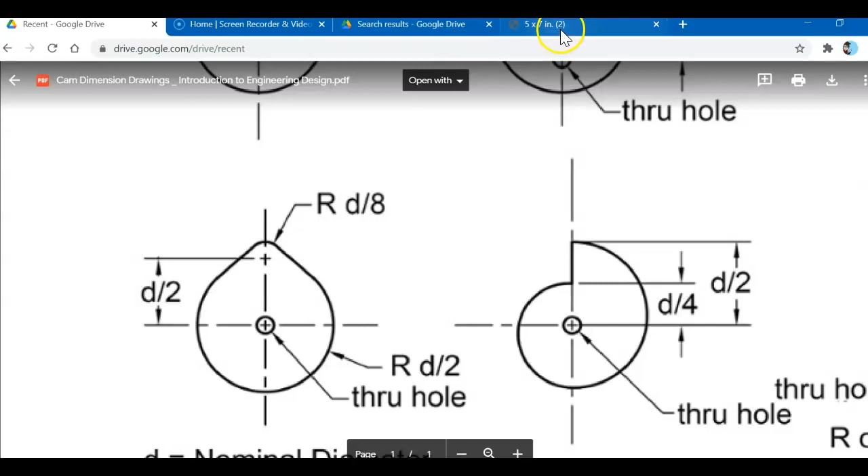In our lesson, you're going to see a pear cam that has this shape. It's kind of like a regular round circle with a little bump at the top. But I really like this one better. It's not in your lesson, but I will give it to you. It just really looks like a pear.

That makes a very smooth motion for your toy. So we're going to work with this one, and I'll share it with you as soon as I get caught up. It's actually very simple. We're going to use parametric modeling so that we can change the size later, and we can laser cut them really quick in the laser cutter using this file.

We can do it right from Fusion. So we're going to make a circle, and then we're going to make a smaller circle, and we're going to add the lines to connect them, and then just extrude it a little bit and add that hole, and we'll be good. So take a look with me.

Whatever diameter you have, everything else is based off that. This radius down here is going to be half of your diameter. And this spacing in between, this will be the center of the small circle, center of the larger circle. That'll be half the diameter. And then this radius up here will be a quarter of the diameter. And then the hole in the center will be 3/16, which we'll change based on whatever axle size we decide to use so it's nice and snug.

All right, so let's see if we can get in there. And we're going to switch back to Fusion. So I'm in a new project. You just want to double check that you're in inches by clicking Document Settings right here. And then you should be good.

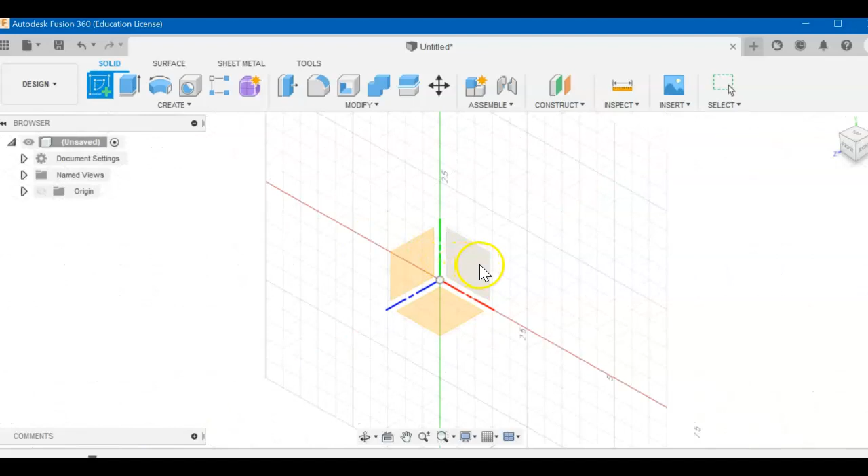We're good. Okay, so we're going to create a sketch, and we're going to put it on the front plane, right here. It's a little tricky sometimes to see it, but you know it rotates to front over here if you're in the right spot. We're actually going to use a line tool to get started. Click the line tool, top left, click the origin, drag up.

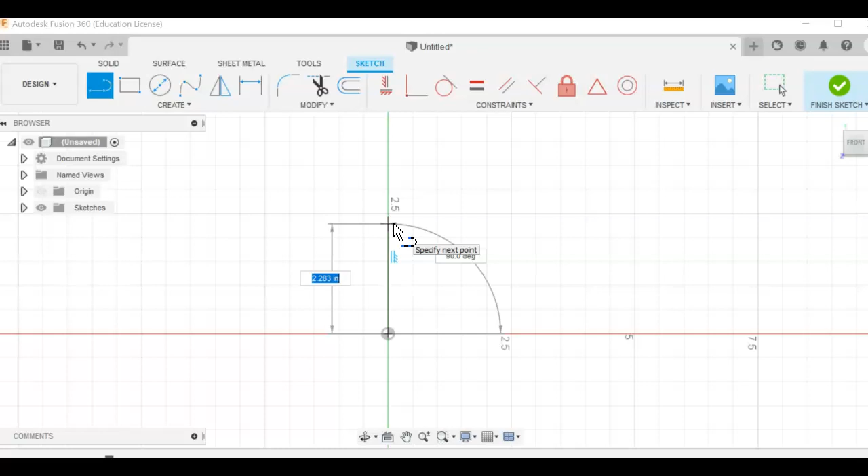Instead of putting in a dimension, we're going to put in diameter, DIA, lowercase - see how it notices what we're doing? And we're going to use the forward slash to divide it by 2. So 1 inch divided by 2. And I'm just going to zoom in on here.

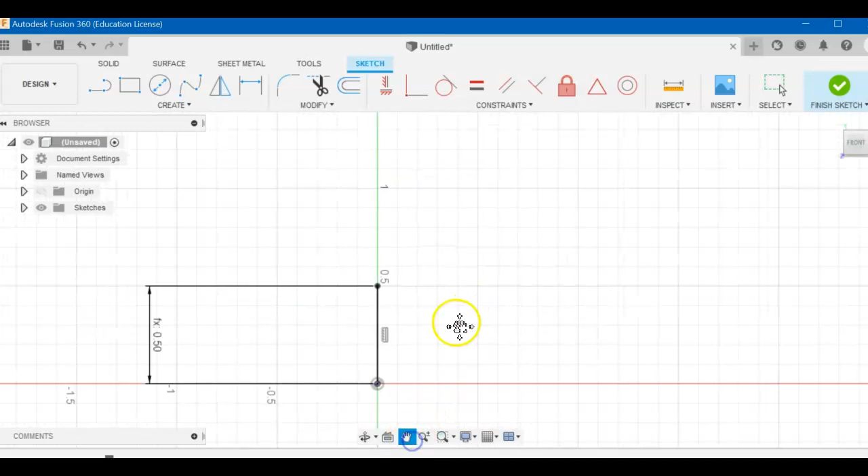As you get more advanced with this, people who do this regularly really enjoy it. They tend to stick with it, they tend to like just do parametric modeling. So you'll see that, especially if you go for internships when you're a little older. If you double click on this, you don't have to do this, just watch - because you could also do diameter times asterisk 0.5, because 0.5 is half, right? Same thing, so you could do multiplication, division. It knows what to do. It's intuitive if you use the right tools.

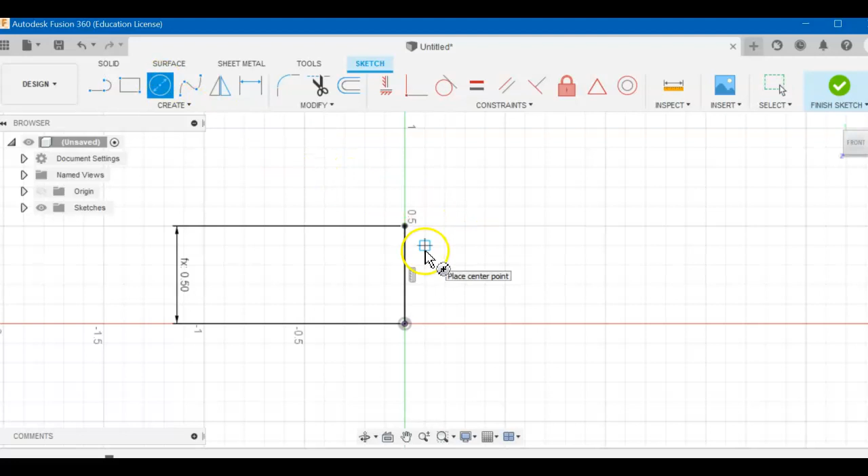So we have that. Now we're going to grab the circle, and this is a little tricky, so watch along. Grab that circle tool on the top there, get on the origin, drag it out, and we don't want to do any dimension. We just want to hit enter. So it looks like it automatically popped one in there for me.

I'm going to click on the number, left click, hit delete on my keyboard, because I want that to go away. Now I want to grab the dimension tool, and I want to right click. So I'm just using my keyboard here, but I want to right click, and I missed it.

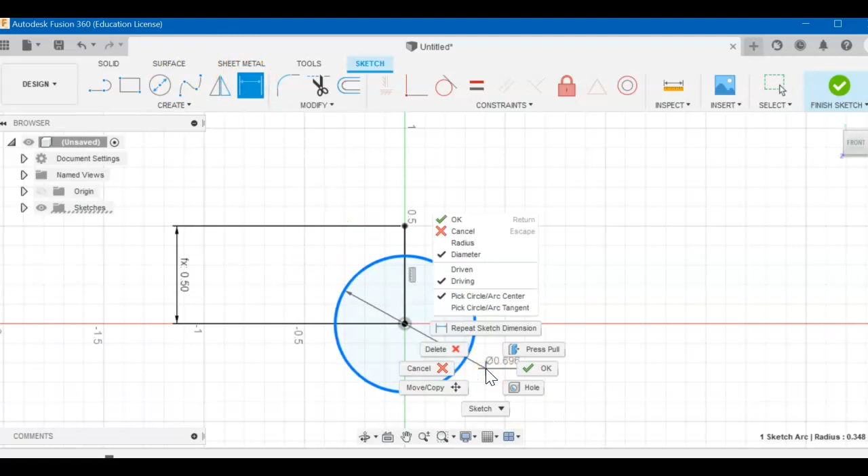I want to try that again. Drag it, dimension, right click, and I want to switch to radius. I imagine I could have done that the first time. I'm new to that part. Yeah, let's get radius. Let me get you the right number. I think it is half the diameter.

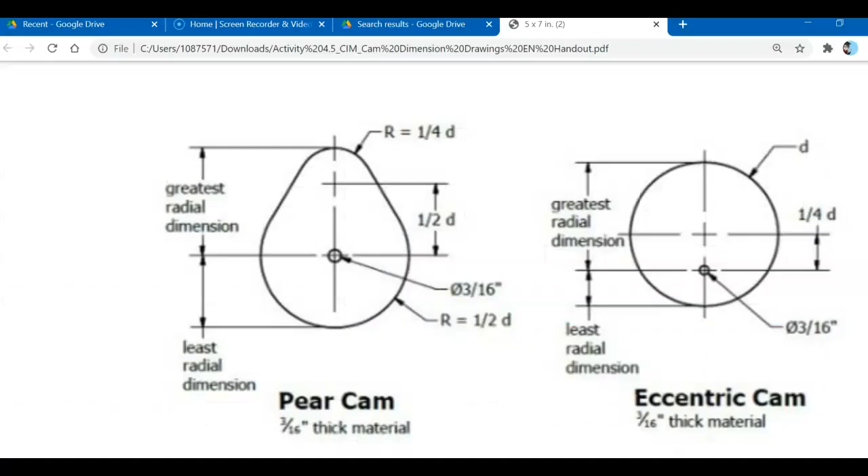So DIA, click it, DIA divided by 2. And I got that by looking here. Radius is half the diameter. So I'm going to say fusion diameter divided in half, 0.5. That's pretty good. The top one's going to be 0.25. So we're going to work on that next.

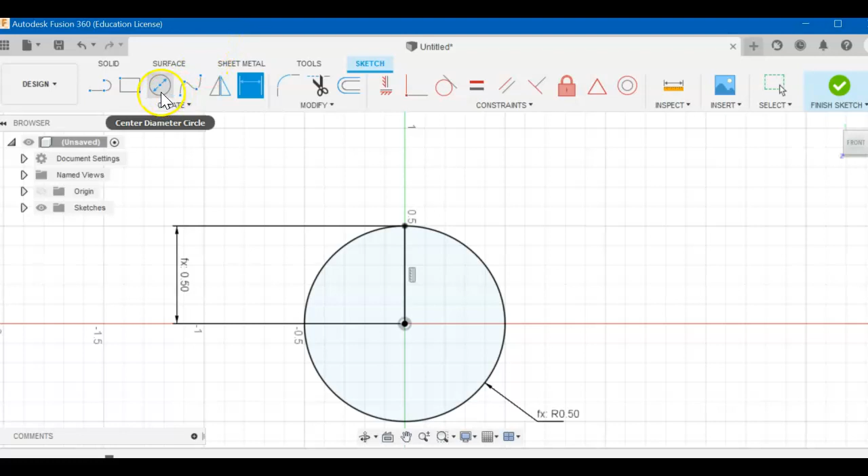Forgive me, let's see if I get to the next part here. Okay, so now we're going to take another circle tool, and we're going to go right on that point that we made there. And we're going to try right clicking. Oh, see, it doesn't let you. Okay, so I'm just going to click. Don't worry about the size.

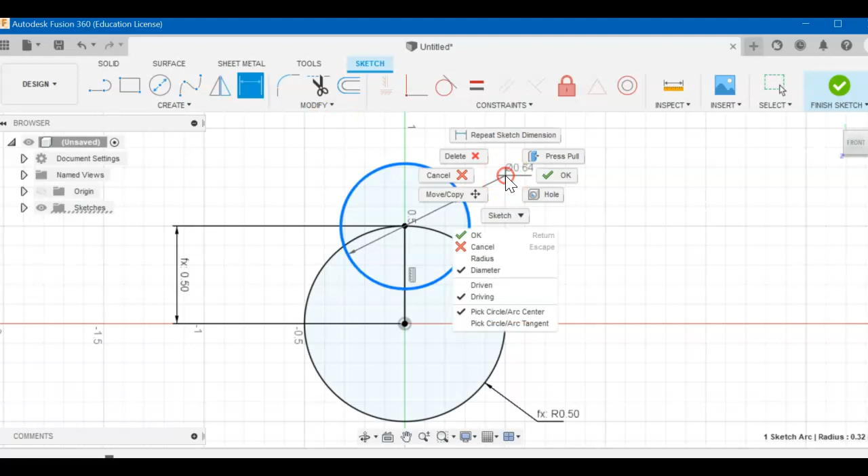I'm going to grab the dimension tool, click on the circle, right click and change to radius. And then I think I may have messed this up. Hold on. Please show me, I'm trying to read my notes from doing this.

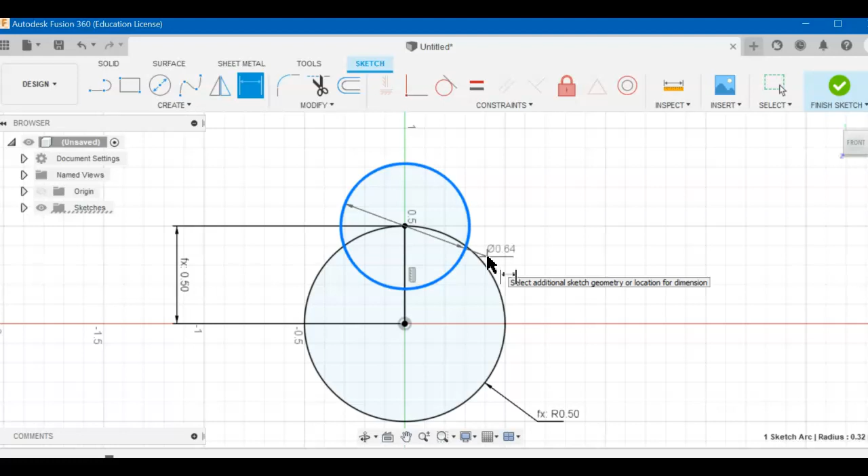And it needs to be a quarter, right? So we're going to put in DIA and divide by 4. So click DIA, divide 4, because that's a quarter of an inch. Okay, a little tricky there, but we're getting the hang of it.

Just drag that over so you can see it. The proper way to do a circle or curved line dimension is to have this. See how it's not straight? Like this would be incorrect. But a curved, a bent line, yeah. Okay, so we're good here.

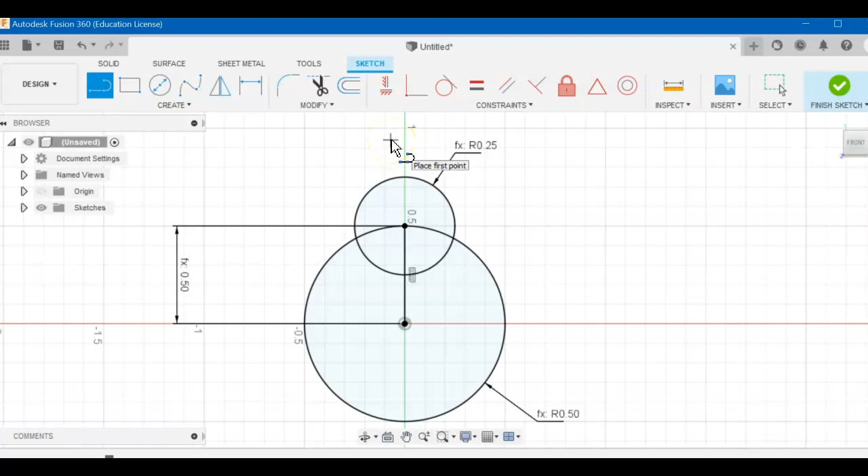Now we've got a little snowman, right? So we're going to take the line tool, and we're going to make some lines that we can make this tangent to. So above and away from the object, just click, drag a line diagonally. Don't worry about the size. And I'm going to hit escape. I don't know why that's crooked, so I'm going to undo that.

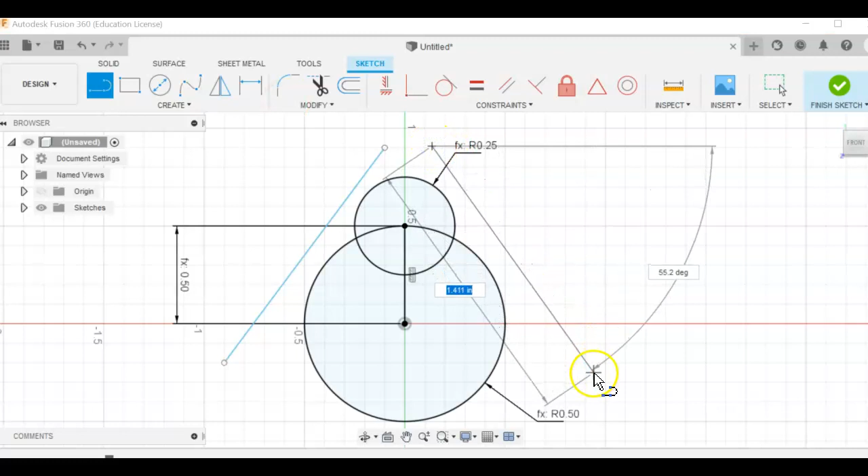Oh yeah, I must have clicked it. I'm not using a mouse. Use a mouse, don't be me. So click, drag, and then get another one. Click, drag. If you find that you're still staying in the line tool, like it's still connected, just hit escape on your keyboard and it goes away.

Okay, so up here in the top we have tangent constraint. A tangent lets your circle touch a line without going through it. So we're going to hit tangent. I'm going to hit this circle right around here and touch the line. Do the same thing down here. It doesn't really matter where, as long as you're in the general area.

Click, click, do it again. Click this outside, click the line, click this outside, click the line. So you want to be near where you want them to touch. This lets me put everything together and I can trim everything out.

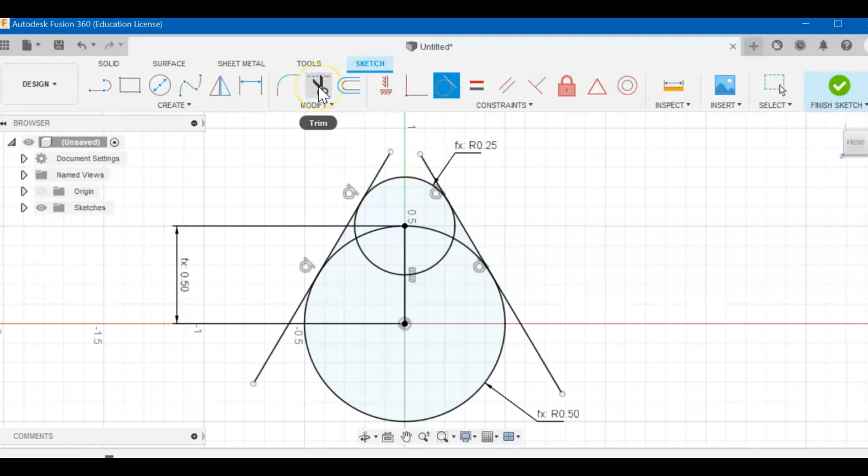So hit the trim tool, the scissors on the top. We're going to get rid of everything we don't want, which is the top of the line and then the bottom of the line. I'm just clicking. It turns purple and it goes away. And then the inside, let's get rid of this, this.

Lots of error messages yelling at you because you had dimensioned something and now it's gone. So Fusion's like, hey, I can't tell this to be this size if you took it away. But that's good, so ignore the warnings. Don't let them bother you.

Okay, I think we just have to do the extrusion and the hole in the center and we are good. Let me just check my notes here. I promise I'll get faster in the future.

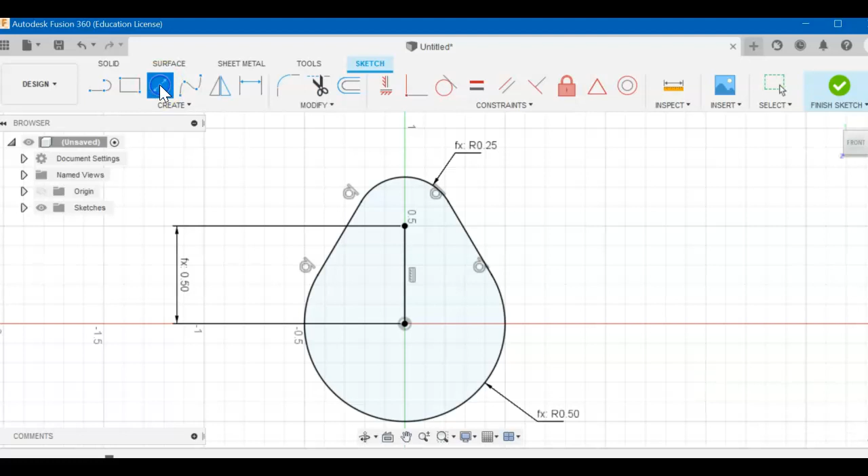Yeah, so we're gonna get the circle tool, click on the center, type in hole, lowercase, and then it should work. Yeah, can't really see it, I'm gonna drag it so you can see it. Type in my hole, and then let me do the extrusion.

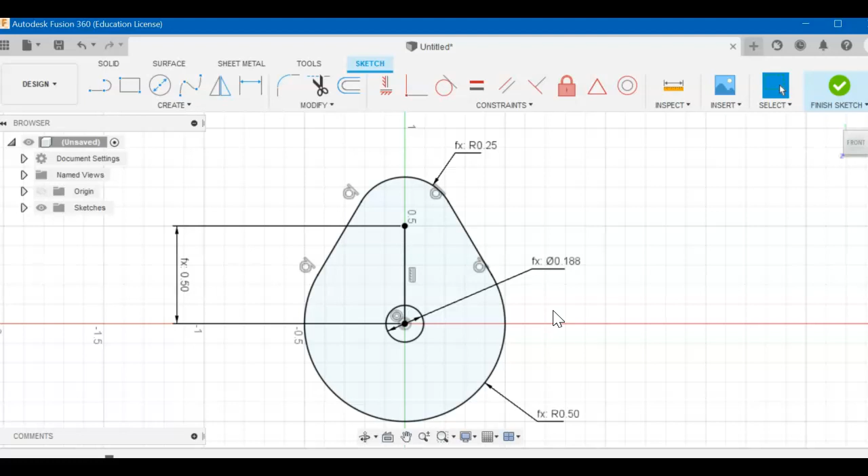So we're gonna close our sketch, finish your sketch. Don't worry about that line there, it will disappear when we do it, and you'll be good. I'm gonna hit the home button so it rotates. We're going to hit extrude,

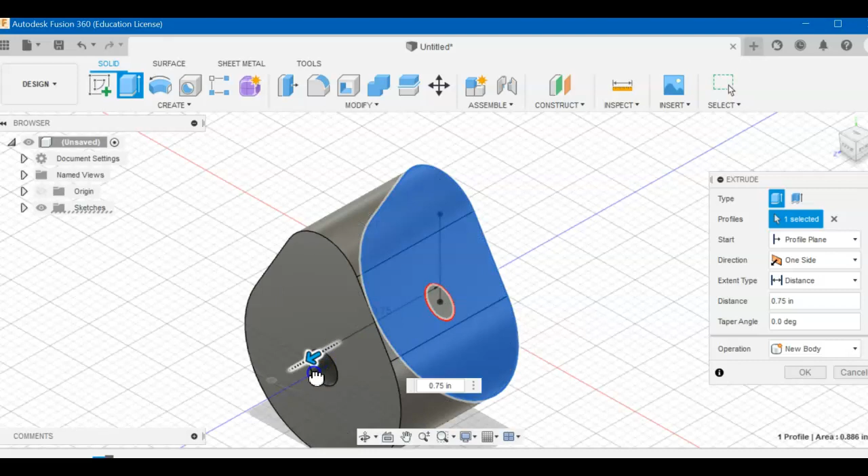and then select in here. That line will disappear as we go. And you can either drag, have fun, but I'm just gonna type in depth. And there you go. So yes, you could do this, hit enter twice.

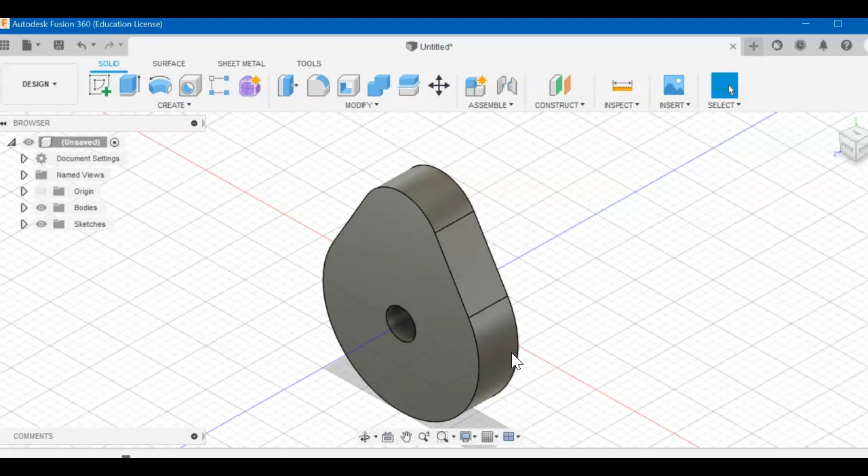You could do this without parametric modeling, but there's a couple of benefits. One, you need to know it for certification. Two, if you wanted to make pear cams of all different sizes, you just come in back to your modify and parameters, right? Make a copy of this, make a new one, and then you change your base, whatever you want to make it.

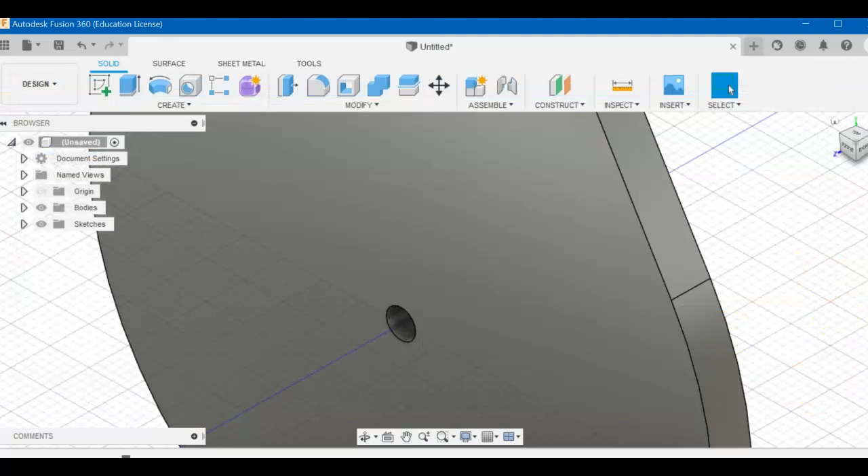So say I make it like 4 inches. You already saw underneath there, it automatically changes it to a different size. So entirely different size we have here, right? Now that stayed the same because I didn't tie it to the diameter. Then you can just make them all day long without recreating it.